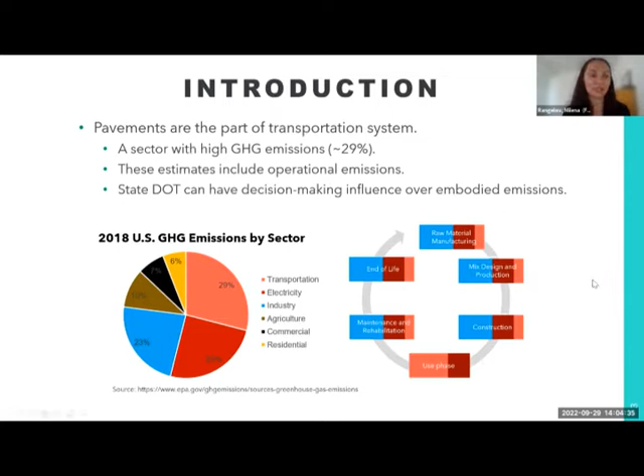All of this is to say that the question, what are the environmental impacts of transportation, is a complex question, and it's hard to delineate, but pavements should definitely be considered an essential part of transportation systems when we're talking about GHG mitigation. Often when we talk about pavement sustainability specifically, and I worked a lot with different state DOTs, we asked them, what are you doing in terms of sustainability? They say, oh, we're good, we're recycling. There is often the idea that recycling is sustainability. We usually call these practices feel goods because recycling makes sense, right? You feel good when you throw your soda can in the recycling bin.

However, we don't really know the benefit or lack thereof of any practice until we do the analysis and calculate quantitative metrics. And as engineers, we are pretty good at that. Here I'm listing some common practices, such as incorporation of waste materials in our pavements. There is an initiative to incorporate plastics, ground tire rubber, other types of recycled materials, increasing durability. Often people equate durability and sustainability. Using local materials, all these best practices. But our premise has become a lot more along the lines of you cannot improve what you don't measure. So we cannot claim that any practice is sustainable outside of the context and outside of quantitative metrics.

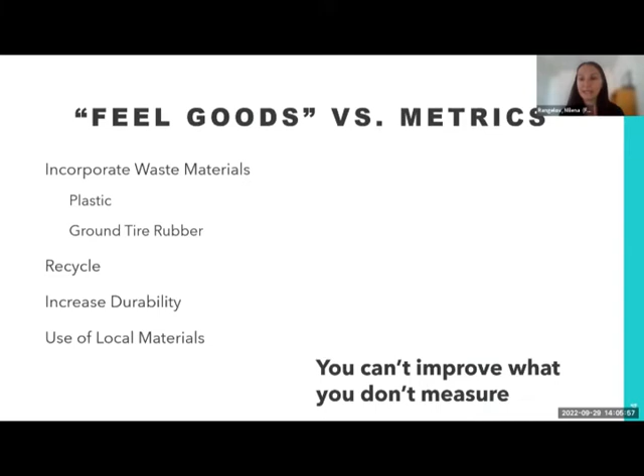When I'm talking about quantitative metrics, we have different metrics for all pillars of the triple bottom line, meaning sustainability represented as the balance of economic, environmental, and social components. In the center, you can see this little road and this little landscape. People often ask us, what about performance? Performance is a must. It doesn't mean that we should just try to reduce greenhouse gases at the detriment of performance. That's where life cycle thinking comes into play. All components of performance are baked into sustainability. That's one little preface. For the economic aspect of sustainability, we have the method called life cycle cost analysis.

I believe in your pavement design classes or other types of classes, you got familiar with this method. For environmental, the method of choice is life cycle assessment. That will be the focus of my presentation. And then for social impacts, we have sustainability rating systems that address all three components, including social, and there is a new emerging method called social LCA.

I'm not going to spend a lot of time talking about that. We can definitely engage in questions afterward on social LCA. That's a new and emerging method, and the Sustainable Pavements program in these last couple of years has done major advancements on LCA. There is increasing interest in greenhouse gas mitigation. So I will be focusing on LCA and the environmental portion of sustainability.

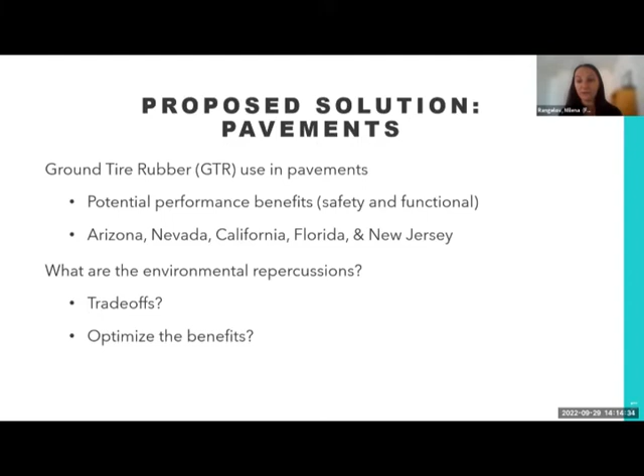But the question, of course, is what are the environmental repercussions and trade-offs? Can you optimize the benefits? How can this practice be implemented in an informed fashion? So in this study, I'm showing you here the pavement product system that we have investigated. And we have compared the conventional pavement section with the GTR modified section.

All these sections were built in Puerto Rico as pilot test sections in 2013. And they have been performing well so far, a very similar performance, or the performance of GTR even being slightly better. So here I'm showing how the product system is formulated. We have components such as asphalt binder, aggregate, admixtures. All of them are shipped to the mixing facility where we perform the mixing.

Mix is then shipped to the construction site where it's compacted. Use phase is empty, and I'll talk about why in just a second. And lastly, we have end-of-life treatment. And then our GTR modified section is pretty much the same, but we have a few additional elements. One of them obviously is GTR that is obtained by shredding, granulation, and cleaning of waste tires.

We have output of waste and steel, and then GTR goes under binder modification with asphalt binder, and then all other processes are the same. These sections were only 2 inches thick. That's why I'm not considering any maintenance here in the use phase. And then there are other impacts of pavement vehicle interaction. We can talk more about that later. That was omitted for this one for some reasons. And again, if anybody has a question, I can elaborate more on that.

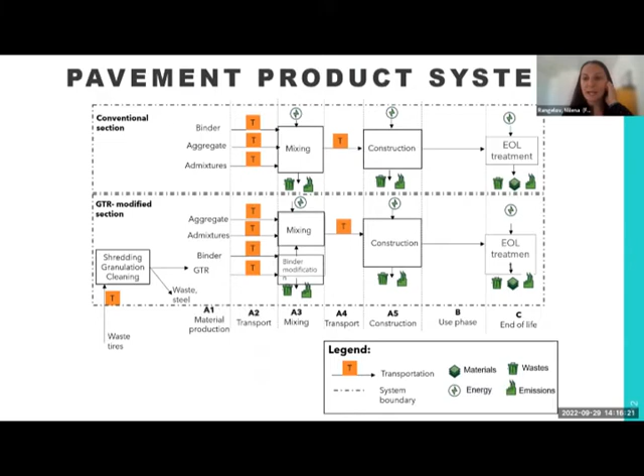First one is acidification, which is the formation of acidic rains. Eutrophication, which is excessive nutrient supply to water, so water pollution with excess nutrients. Global warming potential, ozone depletion potential, and smog creation potential. These should be quite self-explanatory. These mixes are normalized by the annual US production. So therefore, we can not only compare the 2 sections, but we can also gauge which environmental impact categories are more impactful than the others.

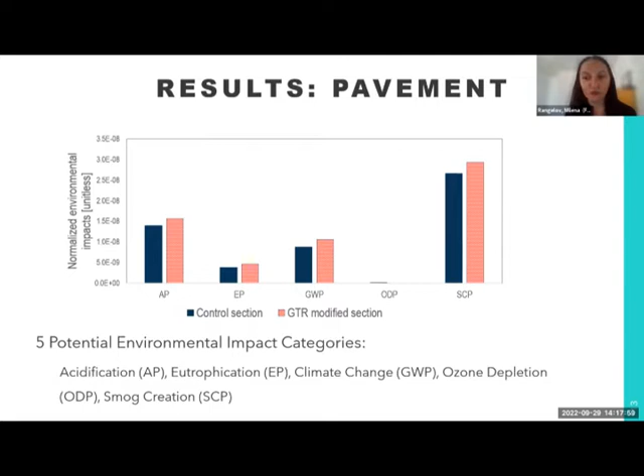So first thing, we can see from the difference between dark blue and red bars that the GTR section has slightly higher impacts, 7% up to 12%, depending on the specific impact category. That's one thing. And then second thing is that the most significant impacts are smog creation potential because of fossil fuels, GWP, and acidification. Eutrophication is typically not very high relative to the whole industry because it's most typical in agriculture. And then ozone depletion is also typically a function of different types of refrigerants and freons, which we don't use a lot in the pavement industry.

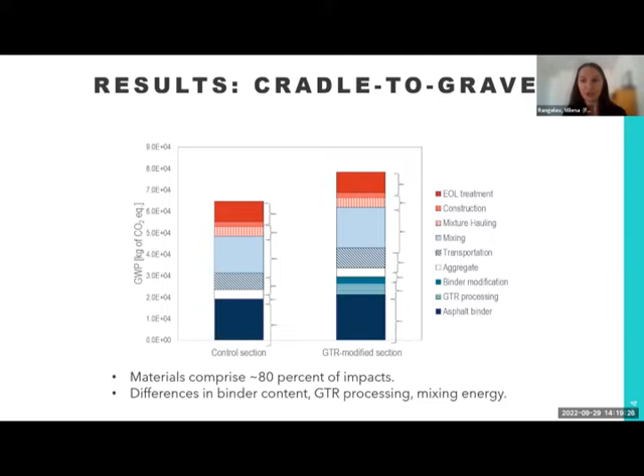So GTR impacts are higher. However, these impacts can be compensated for if the section presents improved performance. So how much better do we need the GTR section to perform so that it breaks even, quote unquote, with the conventional section in terms of environmental impacts? This slide will give you the results. If we assume the 10-year performance of the control section, which is the baseline, we see that GTR needs to perform satisfactorily 20% longer, so that they break even and can be considered equal. So those higher impacts up front can be compensated for by extended performance.

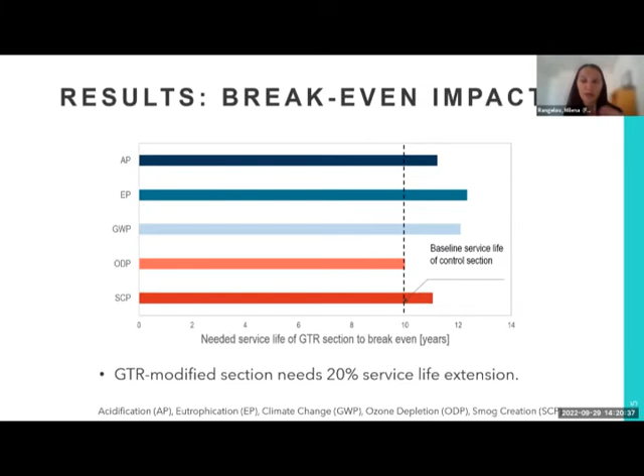Are we going to have that? I don't know, and that's a good question. That's where we collaborate with our colleagues that do asphalt material science. So we definitely need performance data to inform this LCA. This is just hypothetical. So it's like, hey, if the GTR section underperforms, it's not going to be more sustainable than the conventional, but if it performs, let's say for 12 years or more, it will win in terms of environmental impacts.

Here I'm showing the system level analysis, and this is a very interesting one because it was directly used to inform the policy. Here we have the number of waste tires in Puerto Rico, 3.7 million. That's a lot of tires. And we have investigated these business as usual scenarios on the left-hand side, where all of the tires are processed as tire-derived fuel or TDF. And Puerto Rico paving is conventional hot mix asphalt without any changes. However, if policy is introduced, we could be able to repurpose a portion of these tires into asphalt modifier.

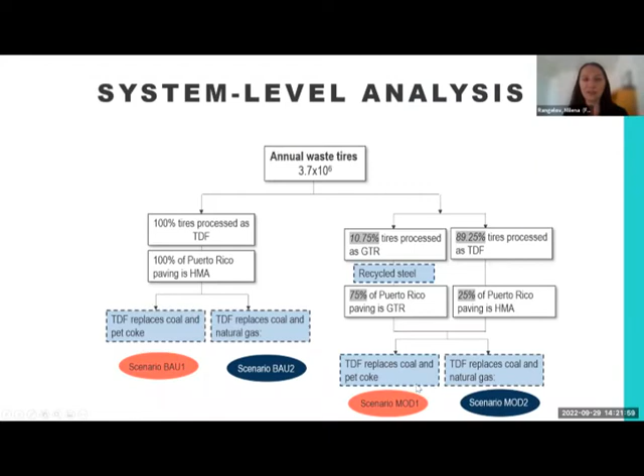We have done extensive analysis on how much that could be. And we have discovered that if you stretch all Puerto Rico systems, you can only eat up around 11% of tires. Keep in mind, this is an extremely optimistic scenario. However, if we do that, we can achieve 75% of Puerto Rico paving with GTR, which is what the policy was investigating, and 25% of paving will remain HMA. So in that case, we would also have some tire-derived fuel because pavements cannot eat up the entirety of tires that are available. There are just too many.

So in this slide, I'm comparing business as usual scenarios to modified scenarios. And there is a difference here if tire-derived fuel replaces an intensive fuel combination or a greener fuel combination, depending on what your cement kiln is using. So in this first scenario, we actually have the modified option. If your kiln is using coal and petroleum coke, a more intensive fuel combination, it makes sense to push tires into the kiln and keep to your business as usual.

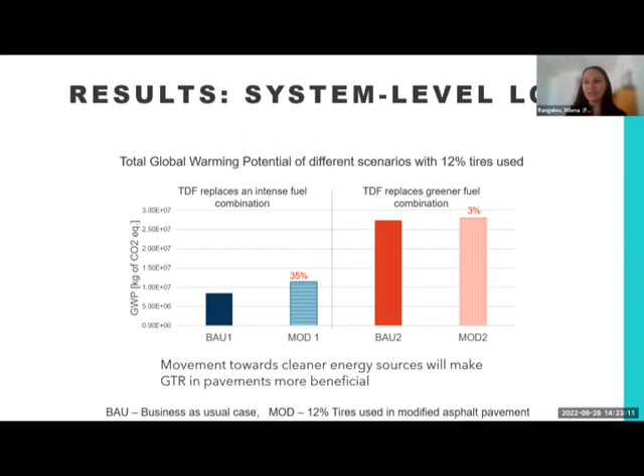However, if you have more of a state-of-the-art kiln, then your business as usual is actually worse, sorry, or equal to the modified scenario. And in that case, using these tires not to replace greener fuel combinations, but rather in pavements makes more sense. This is a loaded slide, so if there is a need, I can explain more later. Just want to keep to the schedule.

So this is my asphalt example, and now I'm gonna switch gears a little bit and talk about my concrete example. So in this study, the Sustainable Pavements Program, which I was a part of, and the Mobile Concrete Technology Center were collaborating.

Mobile Concrete Technology Center is also known as Concrete Trailer. You can see it here. It is actually a mobile concrete lab that travels all across the country and performs the deployment of various pavement technologies. We have an asphalt one, we have a concrete one, so we're kind of covering all of the bases.

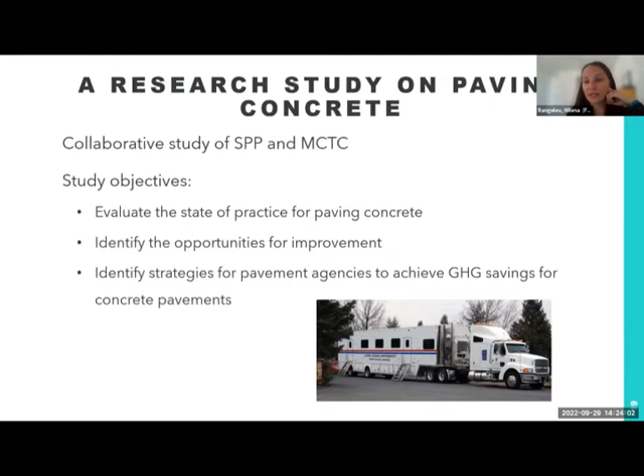So in this study, we wanted to evaluate the state of practice of paving concrete because they have a lot of data out there, and to identify if there are opportunities for improvement from the sustainability standpoint as well as durability standpoint, which is what they are advocating for.

By the way, my first question was, how did you get the trailer to Hawaii? But the trailer didn't travel across the seas to Hawaii. They just shipped the equipment. Anyways, if you look at that report, they have some beautiful sunsets and some amazing concrete pavements.

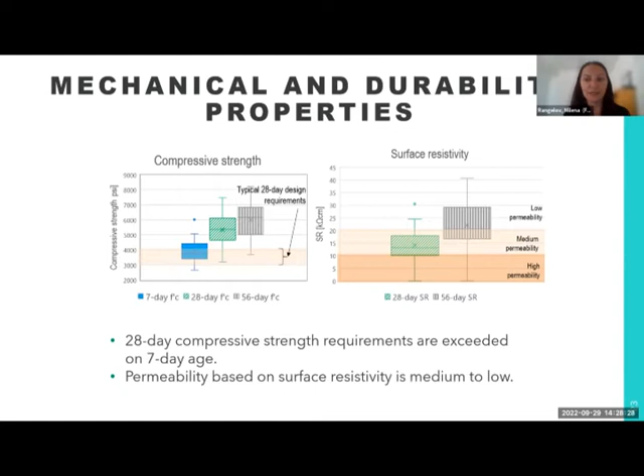We work with state DOTs to kind of assess their transportation distances for all materials, and we created cradle-to-gate concrete LCA. Obviously, this is not cradle-to-grave, but because we worked with MCTC and they gave us some durability data and durability indications, we are confident that our recommendations would not be detrimental from a full life cycle standpoint.

So let's see some trends. This first graph on the left-hand side is showing the correlation between cement content and GWP, global warming potential, in kilograms of CO2 equivalent. We can see very strong linear correlation between the two. And then these mixes are summarized in different colors based on the mixture type. So there are differences in different clusters of the mix, if you will, based on the mix types. However, regardless, across the board, we have very prominent positive linear correlation between cement and GWP. Higher cement, more GWP, period.

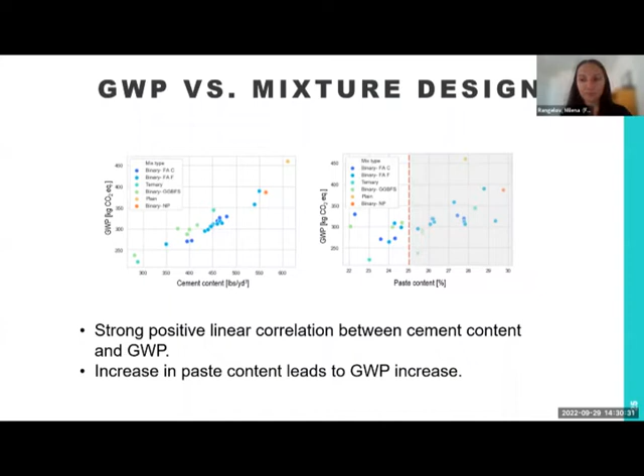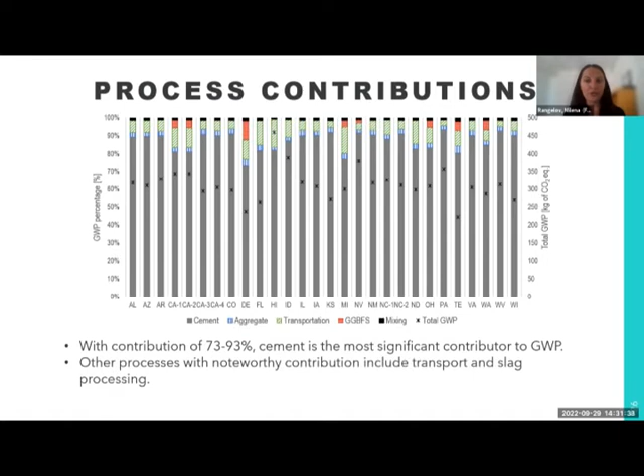So if we want to make concrete more green, we need to figure out the ways to reduce cement content, as well as figure out the ways to make cement produced in a more environmentally friendly fashion. Other processes that are noteworthy are transportation. It all depends on where your constituents are coming from, if you have local materials or you need to ship them, as well as slag processing is another component.

In this slide, I'm showing the business as usual baseline mix as kind of the outside pentagon. And then these are improvements in 5 environmental impact categories when we reduce the paste by making it match the recommended 25%. And by the way, to do that, you need to optimize your aggregate gradation, which is usually straightforward to do. And we can see here that not only does our GWP improve, and we can achieve up to 16% reduction just by doing that, we also see that all other environmental impact categories are improving at the same time.

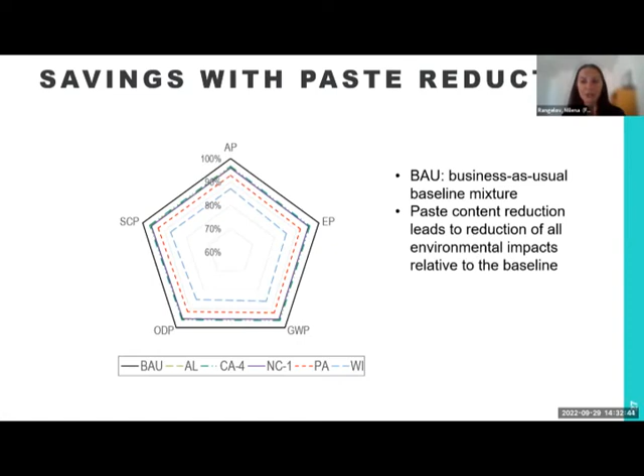So we are not having any trade-offs, plus the cost is going to become lower, and durability is going to become less of an issue. So this is a clear win-win situation and is a readily available technology that can be leveraged immediately. We have published a TRB paper on this. So if you're really interested to learn more, you can contact me and I can share the paper with you.

One last thing I want to mention are EPDs, or environmental product declarations. Why our interest has been on EPDs recently is that there are many green public purchasing initiatives all across the United States. We have seen, first of all, California was a very proactive state that legislated the Buy Clean Act in 2017, in fact, is when it became official. And then Colorado last year and Oregon this year.

So what does this mean? It means that from now on in these states for publicly purchased materials of choice, producers will have to submit EPDs, environmental product declarations, that are based on LCA. And then in some cases, future acceptance of these products will be contingent on global warming potential as reported on their EPD. So this changes how we are purchasing our products. And then in infrastructure, this is very important because that's typically public purchasing.

So there is a lot of effort. We also had Buy Clean on the federal level introduced just a couple of weeks ago in early September. So there is a lot of movement in this space. Very interesting topic indeed. And as you can see here, some other states are considering this. We are not able to track them very well. I do believe Illinois now, speaking of that, is considering this initiative. We have another research project with a colleague that will kind of try to collect this data and update this chart a little more recently, so we know when these acts are legislated, but we don't know when they are considered.

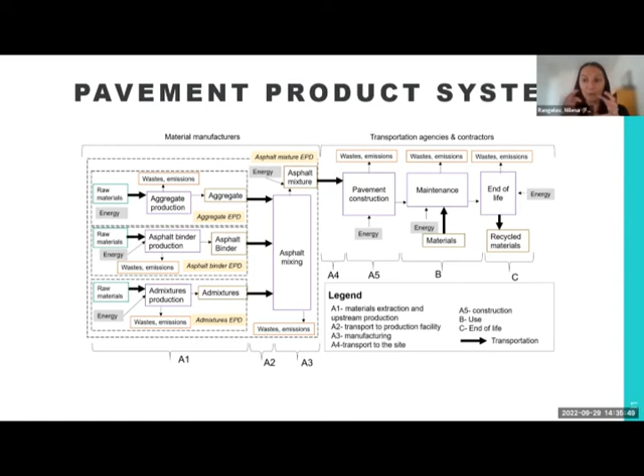You have seen my graphs related to asphalt and concrete product systems. What I did for concrete is very similar to the way you would develop your EPD. Here I'm showing an asphalt mixture EPD, how it can consist of aggregate, binder, and admixture EPDs as mini building blocks. Then the asphalt mixture EPD can be featured in pavement LCA and used as a data source, as a little piece of the puzzle, to help us create this whole pavement LCA product system.

Very important item. Here is another paper that we have developed, and it's about EPDs and EPD uses. EPDs started as a communication tool, and they are now being used as a procurement aid. But of course, we also want to see them used as data sources, and that requires a higher and higher level of standardization. Elements of pavement LCA, this is something that FHWA has been working on a lot.

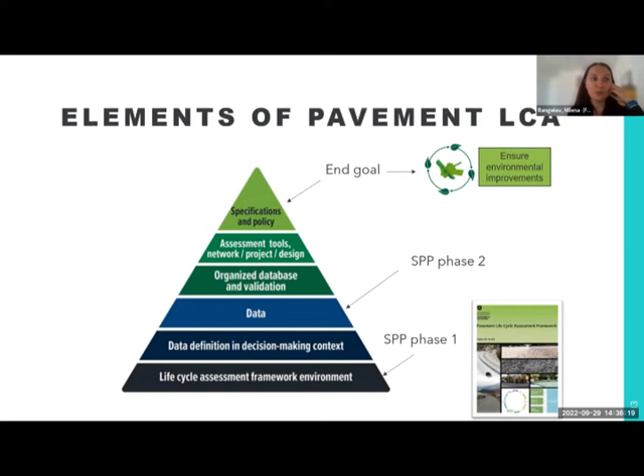We have also developed an LCA benchmarking tool, LCA PAVE, which is completely free and uses EPDs as a data source. So if you are developing a master's thesis or any other project and you need to run pavement LCA based on the latest industry standards, you don't need to pay a dime. You can use this tool. And if you have any material EPDs, you can include them as data sources. More information is available on this website.

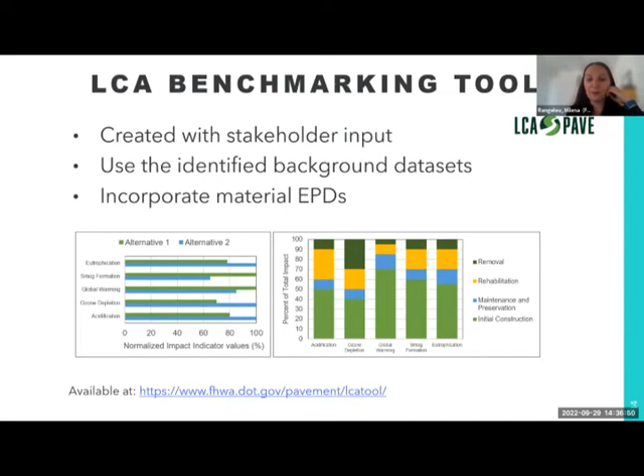I also want to say that the FHWA website on sustainable pavements, let me just go back, fhwa.dot.gov/sustainable pavements, has many more resources that are going to be very useful.

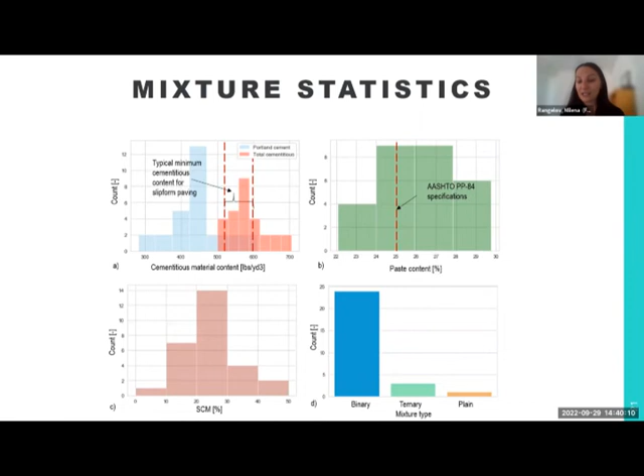The reason why paste is different than just cement is that, let me go back a few slides, I hope I don't make you very dizzy, we have all of these SCMs included, plus the water. So not every paste is equal. Let's say the Hawaii mix, because it's plain, only has cement and water. However, mixes in other states can have any one of these, most likely type F fly ash, type C fly ash, or slag. Because of that, paste quality is not the same.

Also, when we're speaking about environmental impact, cement is the most intensive, whereas things such as fly ash and slag are industrial byproducts, so they have much lower impacts than cement.

So fly ash usually you can incorporate directly in the mix without any processing. Slag needs to be ground, but it's definitely much less intensive than producing cement from scratch.

I see. Thank you. Okay. Excellent. Any more questions? Maybe Larry could go. Hello, thank you for the presentation.

I was wondering if you can give us some details about the social aspects, like what are the important inputs and outputs of the environment? Very good. I like that question, and I think this is a very important up and coming area of work. And how it pertains to pavements, I'll be honest, we don't know yet, so we haven't figured that out.

However, this type of research and development, if you will, has been very prominent in the space of consumer products, such as electronics. So for instance, if you buy a cell phone, you would like to know if your battery is produced from cobalt from Congo, where you have child labor, forced labor, all of these other issues. For pavement products, we are kind of lucky in that regard because most of our components are local, so we don't have the same concerns.

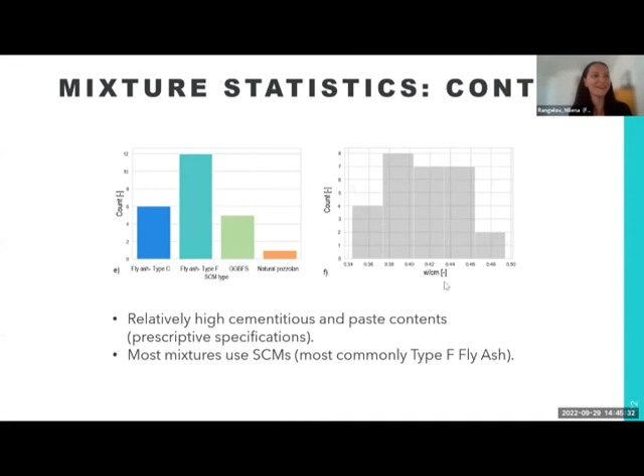So far for most products, we have just one industry average environmental profile for cement, whereas cement you can get in Illinois or in Virginia could be very different cement.

With that, there is definitely that question of, hey, how accurate is it? So every 5 years, these rules for EPDs are updated again and again, and they tell you exactly how to run your LCA for EPD based on the latest industry standards.

So I'll give you the example from concrete and the concrete industry. For now, let's say cement production, this portion is very significant, as we saw from my results. It is only using industry average cement EPD. However, in the next iteration, I'm hoping that they will use product-specific cement. So they will have differentiation based not only on cement amount, but also on the type of cement that you're using.

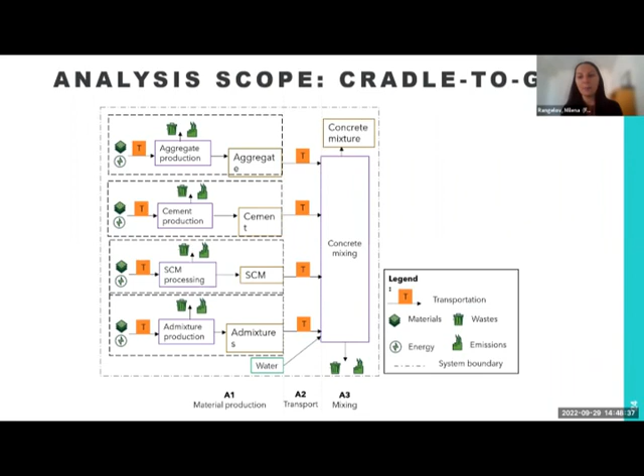I was participating on the aggregate PCR committee to update the PCR for construction aggregates, and we were approached by several companies that produce carbon capturing aggregates, and they said, hey, can you include our carbon capturing aggregates into your EPD program? And our EPD program was for regular aggregates. We had steel slag aggregates, we had recycled concrete aggregates, we had a little bit of this and that, but not these absolutely new products that have never been seen on the market before.

And we asked them, hey guys, can you tell us what is your process? How do you produce these aggregates? And they said, oh, sorry, it's a proprietary process. We cannot tell you. And of course, in that case, they cannot be part of the EPD, because the EPD program is covering your regular bread and butter aggregates that you crush, sieve, wash, nothing fancy. So you don't have any of these other processes that are kind of emerging. So yes, EPD is definitely a good tool for your regular mixes, but not for very innovative products.

Thank you. So we may go with one last question quickly, which is an online question from Professor Al-Qadi. So I'll read it for you. Thank you for an excellent presentation, Milena. Is Federal Highway Administration working on CO2 capturing or storage? And he adds UIUC has a major program on this with Department of Energy, and cement is a major part of it.